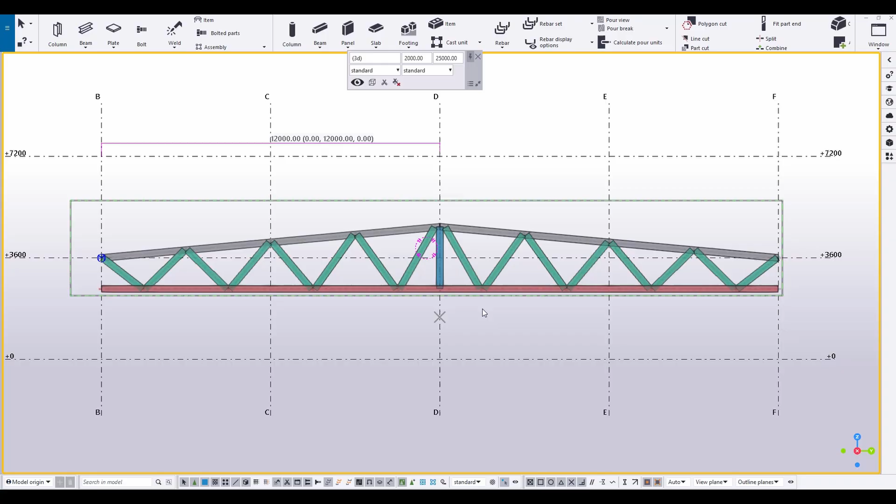A new tool for trusses is in development, and I hope it will be available for download in the warehouse soon. The focus is on direct editing, and there might be several different types of trusses. Let's create a 12-meter triangular wooden truss.

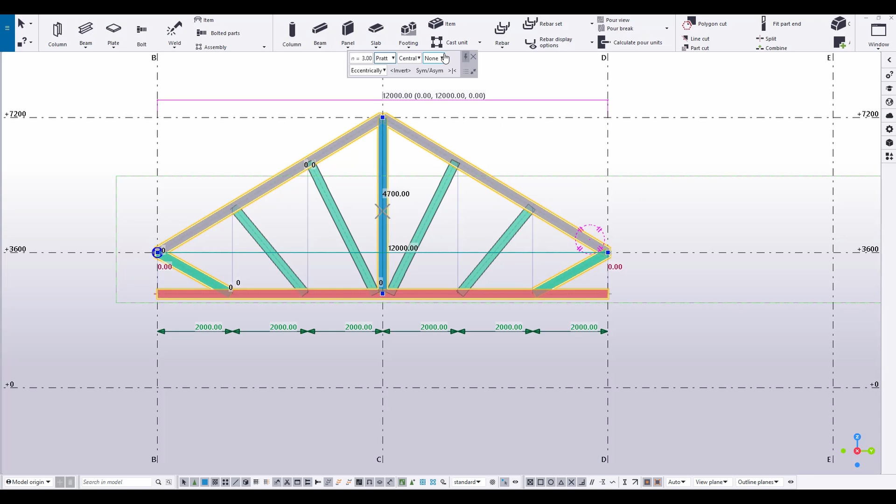Using the MPD edit tools, this is pretty simple and convenient. The truss geometry is already set, so let's create steel plates using the updated Plate on Face tool. By selecting the faces of the wooden elements one by one, I can create steel plates on them.

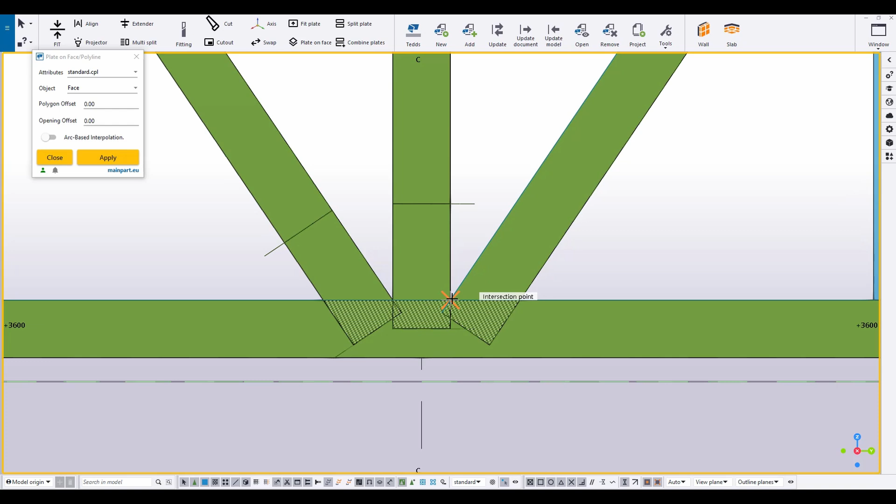Next, I will split the steel plates into two parts using the Split Plate tool. I select the plate and a point on its face. A perpendicular line through this point will divide the plate into two parts. It's convenient to use relative snapping. By holding Ctrl, I can select a point intersecting the lower beam and measure the desired distance from that point.

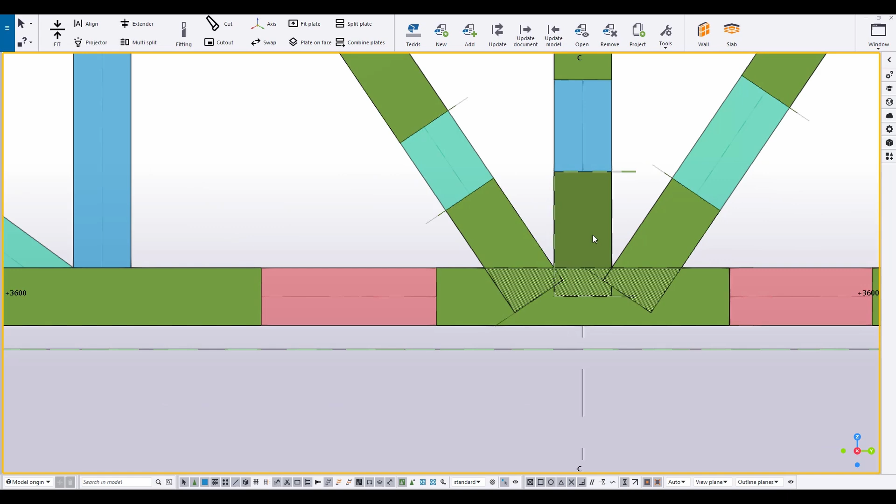These plates will be used to connect the truss elements with dowels. Here's the idea. First, create plates on the element faces, then split them into parts and combine them into a single plate.

Now, I will move the plates to the middle of the wooden elements. Using the versatile ring plate tool, initially designed for ring elements, I will cut notches in the wooden elements 1 mm wider than the thickness of the plates.

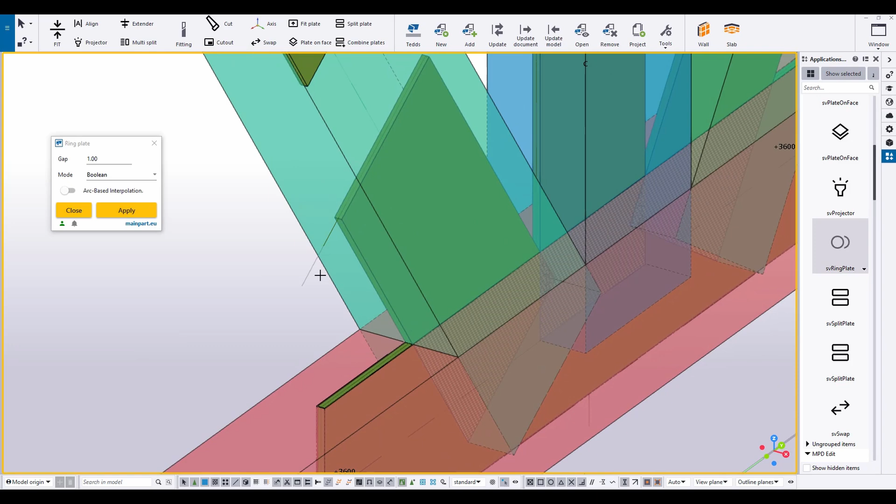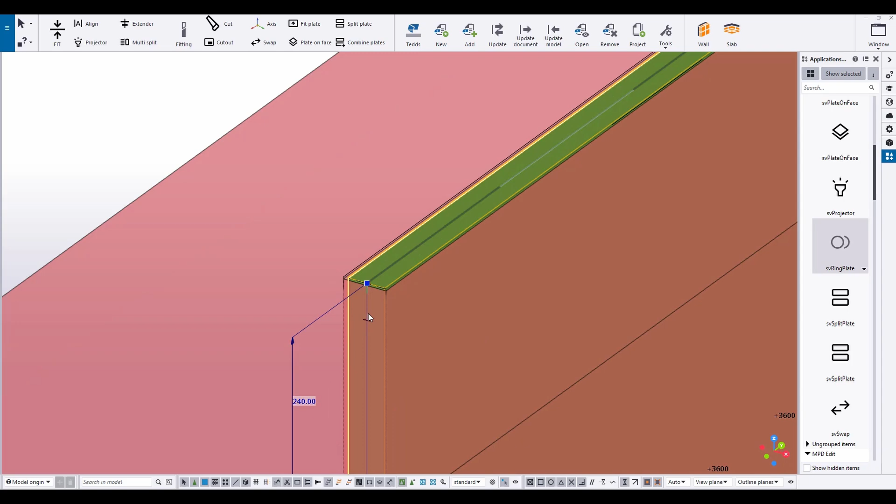I'll slightly enlarge the cuts in the wooden elements to make it easier for hypothetical builders to assemble this imaginary truss. Now, we can merge these separate plates into one using the Combine Plate tool, which I will soon modify to reduce errors during plate merging.

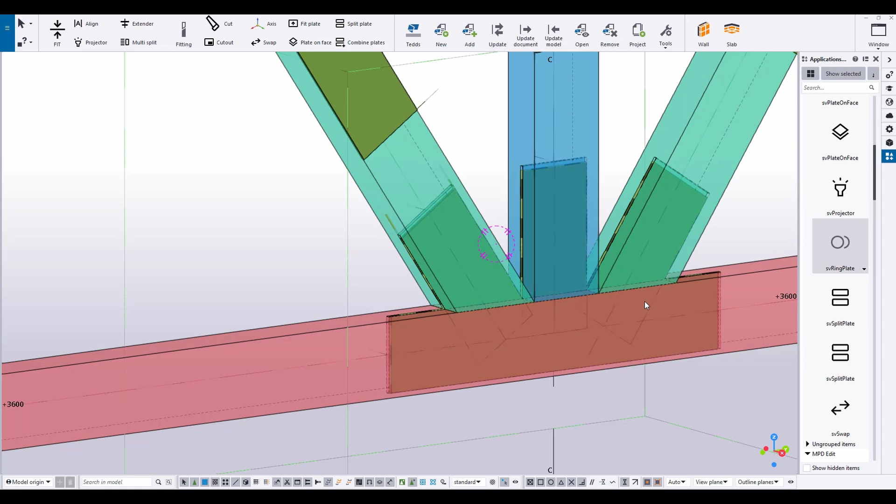Next, I'll cut the diagonals and verticals along the lower chord of the truss using the Cut tool, which is very convenient and easy to use. The next step is to create dowels for the truss.

I feel like I'm not quite used to the new bolts in Tekla Structures 2024 yet. Looks like I need to watch a tutorial video. It's kind of ironic, watching a tutorial video and thinking about watching another tutorial video. Anyway, it's fine. This isn't a real truss. Don't judge me too harshly for this.

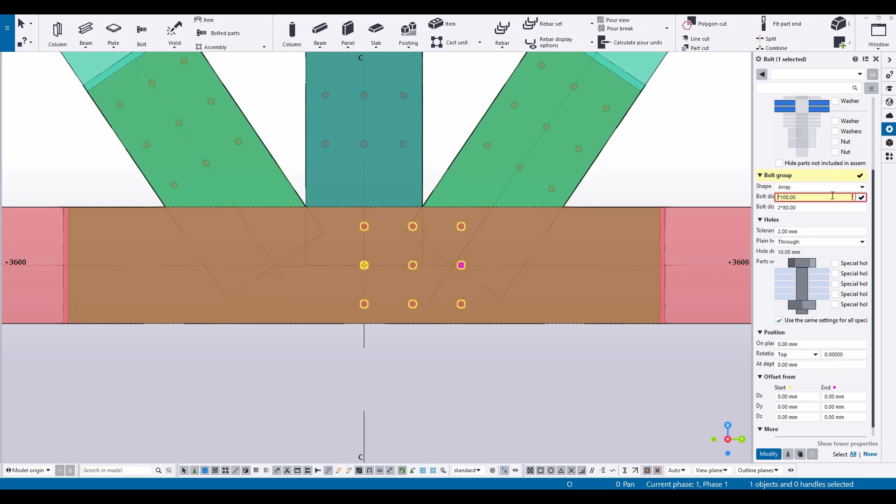Now I'll slightly adjust the plate geometry to make it look more harmonious. The next connection is created in a similar way. I create plates on the faces and cut them, just like in the first connection.

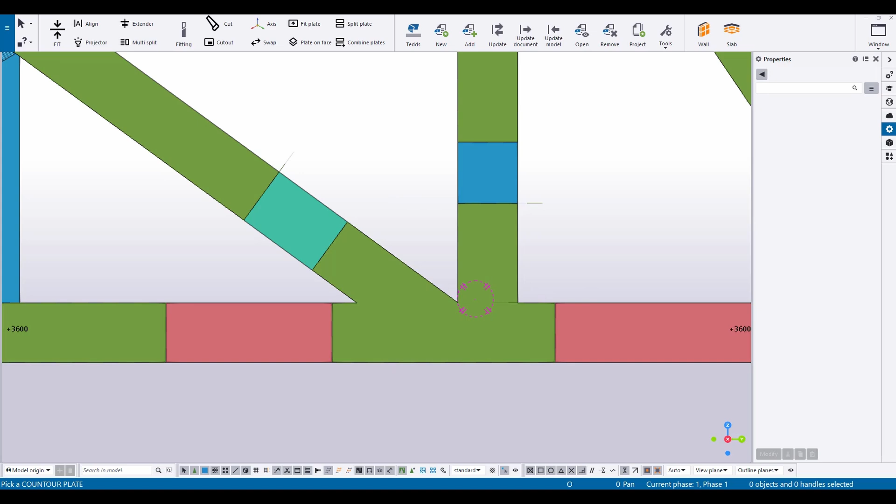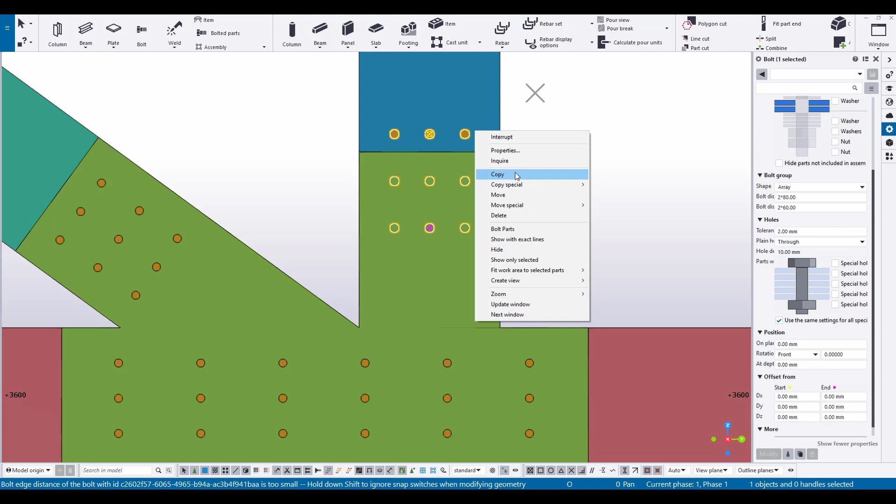For variety, we can merge the plates into one first. I'll create dowels with a diameter of 12 mm. By the way, this is the most popular diameter for such trusses. Then we'll move them to the middle of the elements and finally cut the wooden elements with these plates. This method works too, it makes no difference.

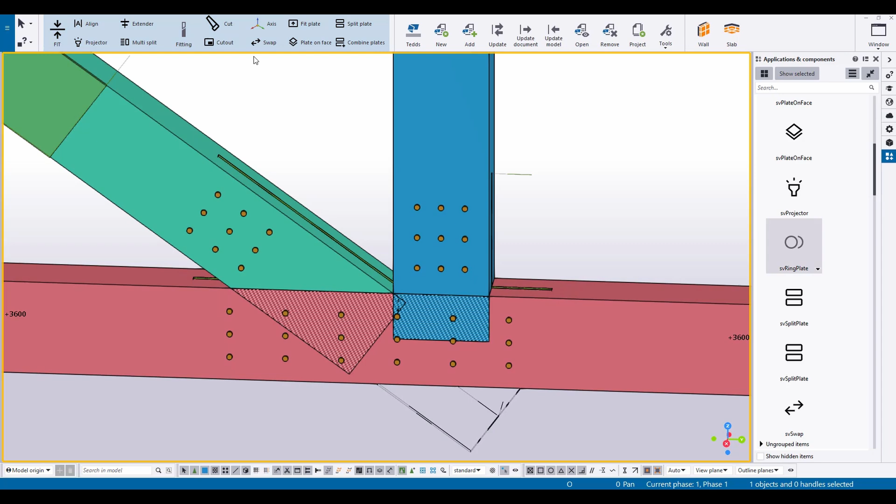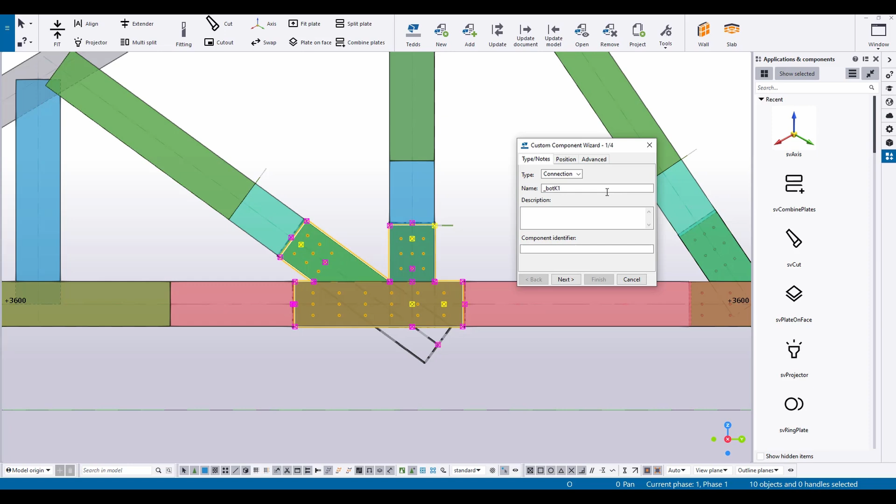And finally, my favorite part, we can create a custom component and apply it to the other half of the truss. Isn't that great? Then we'll repeat this procedure for the other truss connections. I won't bore you with the details. I'll just show the results of these manipulations and probably post the IFC of this truss under the video.